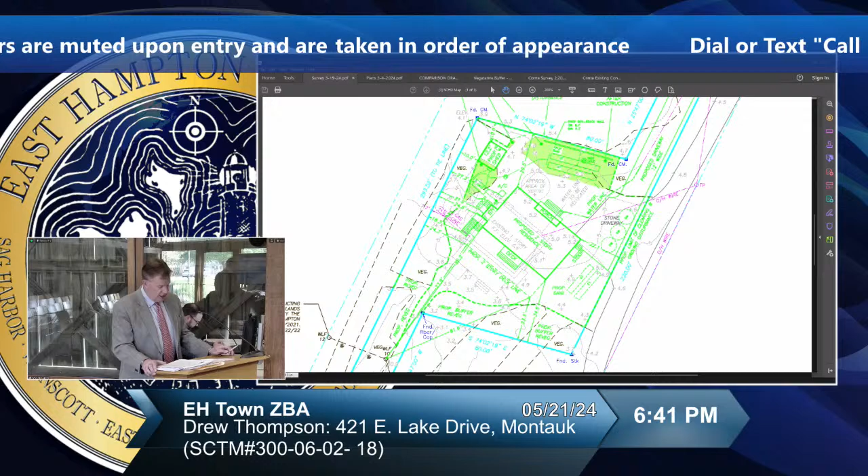Rather than challenge this and ultimately come back before you, which is probably the way this would have gone, my recommendation to Drew and Stephanie was solely to listen to the board's deliberations and discussion when you decided this, as well as the hearing, and try to revise the application to achieve the best possible result, and request a rehearing by a full board, which is why we are here tonight, and thank you for the opportunity. Hopefully this will allow for a speedier consideration of our application, which we believe we improved on in every aspect of the proposed application.

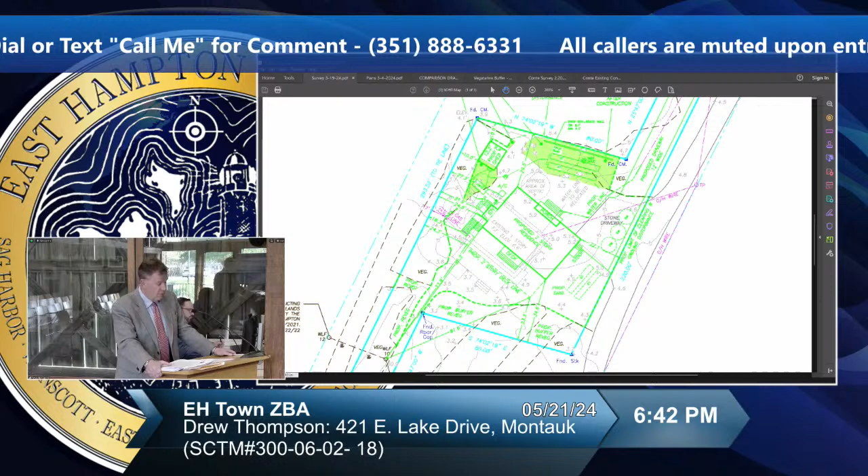We made several notable changes to the application based on the prior board discussions that I wanted to briefly touch on. The revised architectural and floor plans were prepared by Victor Cuneo, dated March 4th, 2024. I also included on Friday a graphic that I had Victor draw to accompany these that I submitted last week.

It basically shows the reduction in both the massing, which was accomplished by reducing and eliminating a portion of the roof line. That was my idea, for the record, when I looked at it, as well as the reduction in footprint and accessory structures proposed on the residence, shown in the gray outline.

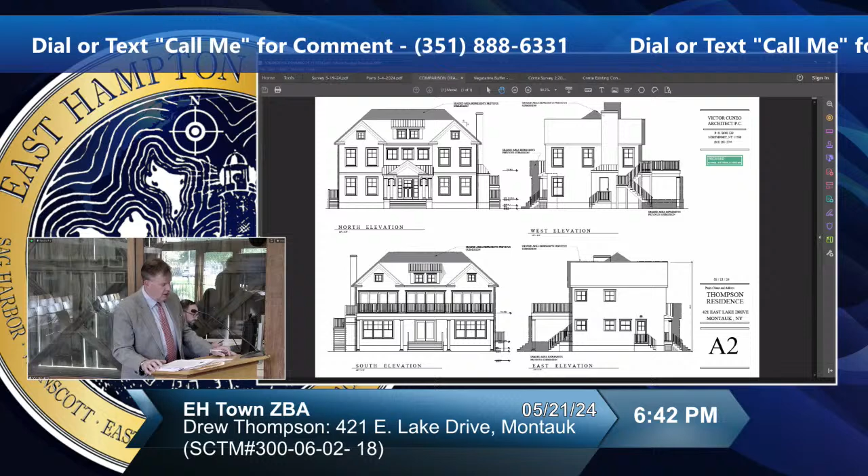We made changes to the plans consistent with the board's discussions that dramatically reduced the structure in several dimensions, as well as floor plans showing the reduction in gross floor area. As revised, now the house is 2,307 square feet or so.

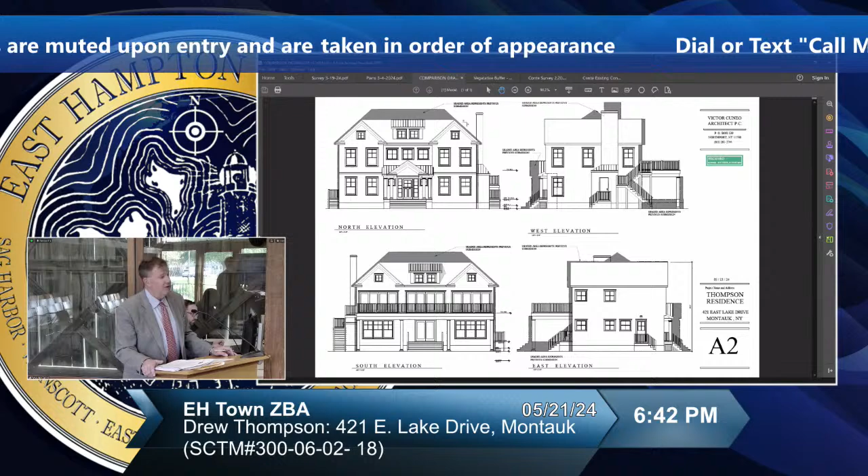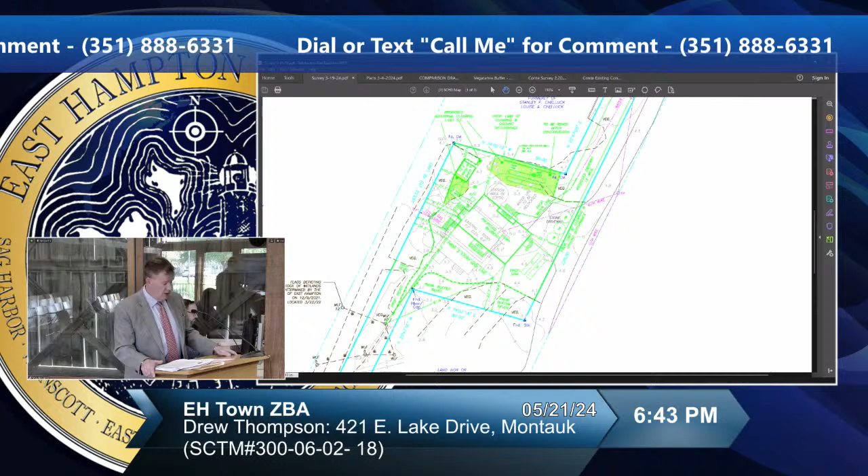We also submitted the revised survey by George Walbridge. The survey depicts the increase in setbacks. We're not talking about acres of setbacks here. This is a property that was being developed in accordance with both the need to comply with pyramid law as well as the lot area on the survey, but our decrease in proposed clearing, reduction in the decks, and the overall metrics of the application, including total lot clearing, total lot coverage and lot coverage.

We also submitted a revised revegetation plan from Jim Grimes showing that we have proposed more revegetation along the south side of the property. We reduced clearing by an additional 1,000 square feet.

I do think it would be possible to expand these planted areas if the board deemed it necessary, but I'm reluctant to tell a family of what's about to be 4, with 2 young children, that they can't have more than a postage stamp area outside to enjoy. But if you did deem it necessary, we could further sharpen our pencils.

In sum, we reduced another 365 square feet of gross floor area, reduced lot coverage by 155 square feet, and 366 square feet in total lot coverage, all from the plans that were already reduced based on the board's prior hearing.

I was sort of disappointed in the memo that Tyler prepared. He seems to dismiss these important changes to the project, particularly because 2 of the existing board members here tonight voted to approve the larger application.

I just don't think Tyler is giving, at the time, 50% of the board who voted for this application, as well as my client, any voice in this.

I can tell you the changes to these house plans, which are modest by any standard at 2,300 square feet without a basement, for the record, are not easily accomplished and were not without cost and impact to the Thompson family or their expectation. I was also dismayed to see a recommendation of the planning department that actually recommends a 2,000 square foot house on this property as being more appropriate.

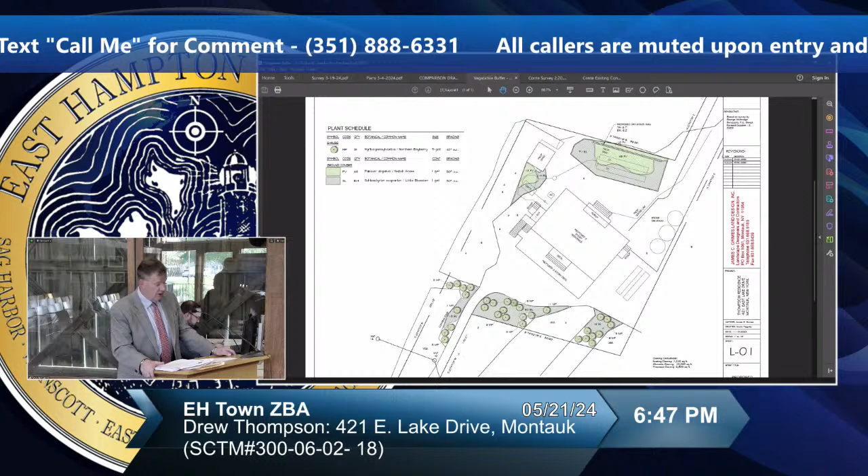I believe this current proposal qualifies for the grant of the requested NRSP and the grant of the requested variance, and will provide both the improvement of environmental conditions on the property and be consistent with the character of the community.

Perhaps this is a small improvement in the immediate area, but if the adjacent residences, some of which are much closer to the lake, and the commercial uses next door were held to the same exacting standards, the planning department would acknowledge the overall benefits of this application are a step forward in this area.

I'm available for any questions. Does anybody have any questions?

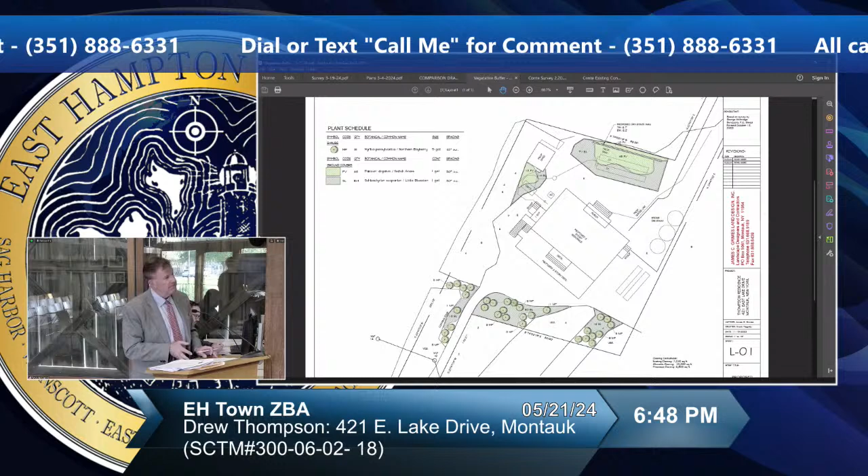You say that you're reducing it by 365 square feet. That's from the first application. What's the GFA on the house today? It's actually over, I think it's 600 square feet from the first. The prior application was 2,660, 672. Yeah, so now we're down to 2,307, 300 something. Yeah, so it's about 365.

But the house today is 888 GFA square feet, right? It might even be smaller than that. I think it's 720 square feet.

I think what's interesting here is that these 3 houses at one time, I don't know, they must have been fishermen's cottages back in the day. Clearly, the one on the front side has been redeveloped as one of the 3. These 2 remaining cottages are the only 2 remaining.

I don't consider this a small lot, by my calculations or by my experience in Montauk, nor do I consider a 720 square foot house a reasonable residential use when you account for the fact that we're going to be able to reduce clearing, install a sanitary system, and otherwise comply with all available metrics that we show in our application.

How much is the clearing going down? Between the two proposals, I think our total proposed clearing is somewhere in the neighborhood of 80. I think Tyler actually has it down with 6,800 square feet. Originally we were proposing 7,880, so we reduced clearing by another 1,000 square feet.

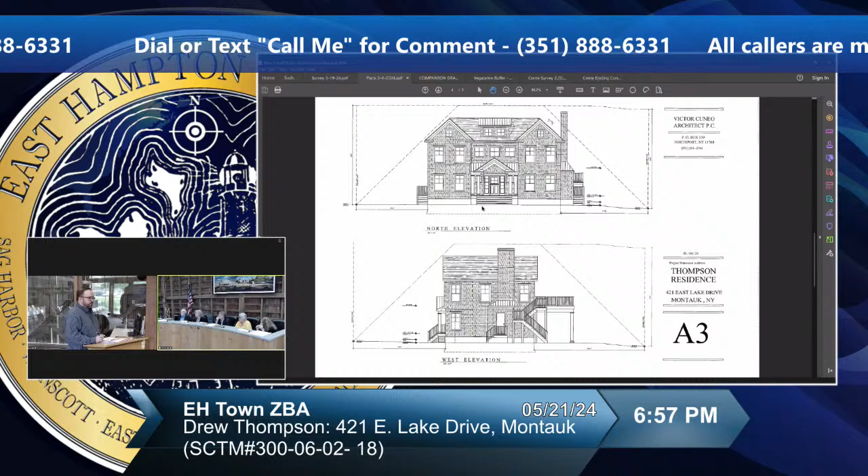Tyler, can you put that back up? I looked at it in the file, but... oh, it does show it on there, I'm sorry. The height and the pyramid lines, I'm just having a hard time seeing it. I just wanted to refresh where the house comes out now. I know it's within that, it doesn't pierce, but I just wanted to check. I'm just trying to focus, I can't see it from here, sorry, the AC's running. It's close to the line, but they are conforming.

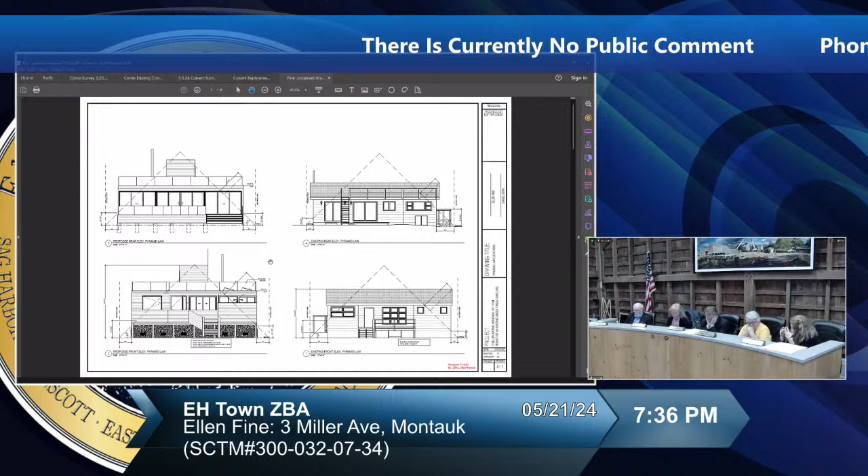And we didn't really bring it up at the hearing—we did talk about whether they could design it differently or position it differently. So I think, even with all the risks and how problematic this lot is in terms of flooding and standing water, I can't say definitively it doesn't meet the standards. So that's why I'm saying I'd approve it.

My viewpoint is that the slight adjustment in the side yard lines is diminished by the increase in environmental protection on this property. There is an increase in environmental protection—there is, that's true. So that's my feeling.

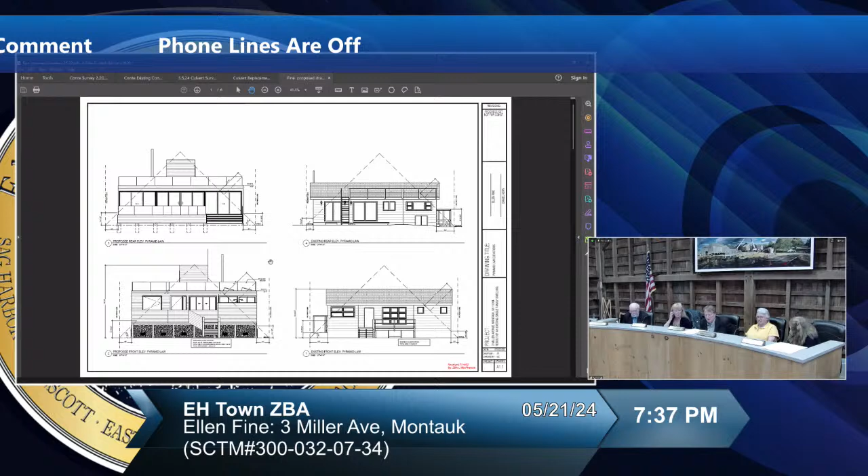So where are we, or what was your final vote? Waiting on your vote. Oh, you're approving it—okay, I would approve it, but denying the variances for that south deck and the hot tub. Well, it's all one—the deck and the hot tub, it's sort of one set of variances.

It's gonna be tough for you to write up. Yeah, I'll try. I don't have the TAM in front of me, so were there any other conditions? Conditions, yeah, I can look it up.

Brian in his memo, as far as some of the protocols that they submitted, had some recommendations. He said he has no objection to replacing the culvert, but would caution that the applicant try to maintain the existing flow rate. So there's that paragraph in his memo, so that it doesn't go faster and doesn't go slower.

Could that exacerbate it? Drew Bennett designed it, right? It was designed in his new plan. It's a design, but Brian has a concern, because he said if they don't have the right speed, if they slow it, they'll flood one side, and if they increase the speed, I don't know how we manage that, but a condition, how we condition that.

I don't think you can legislate that. No, but is there a condition of some sort of inspection and oversight as that work is going along? Is there anything that we can really do, because that comes first—sorry, not first, the septic comes first, but then the culvert happens before you get to the structures.

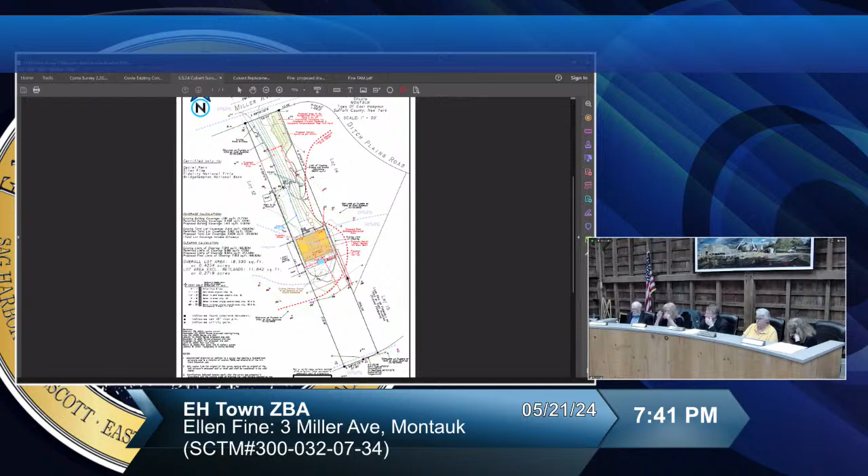I can't see, where does it go from—yeah, I see it, where's the 12-foot? Okay, yeah, 12-foot line is essentially right here. Make that bigger. Okay, thank you, I'm good now. Thanks, moving on. I'm missing my—for sure.

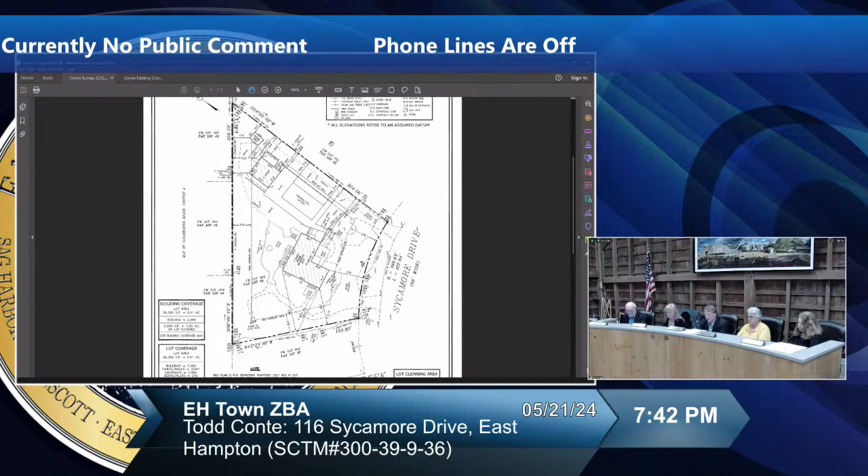We next have Todd Conte at 116 Sycamore Drive, East Hampton. Suffolk Tax Map number 300-39-9-36. This is a variance without a hearing.

Tyler, you want to pull up that illustration so the board can see it. This is a 7-inch variance, 6 inches typically. We have a TAM from Morgan, a very short one. That's the one - it'll be easier just to see. I wanted the board to see that there's the patio, the sideline, the side yard, so you can get a view of what we're actually doing here.

This is to allow a pool patio to remain 19.3 feet from the side yard lot line where 20 feet is required. As Chairman Deline noted, a variance of 0.7 feet pursuant to 255-1110 of the East Hampton Town Code, to allow the pool patio to remain 19.3 feet from the side yard lot line where 20 is required.

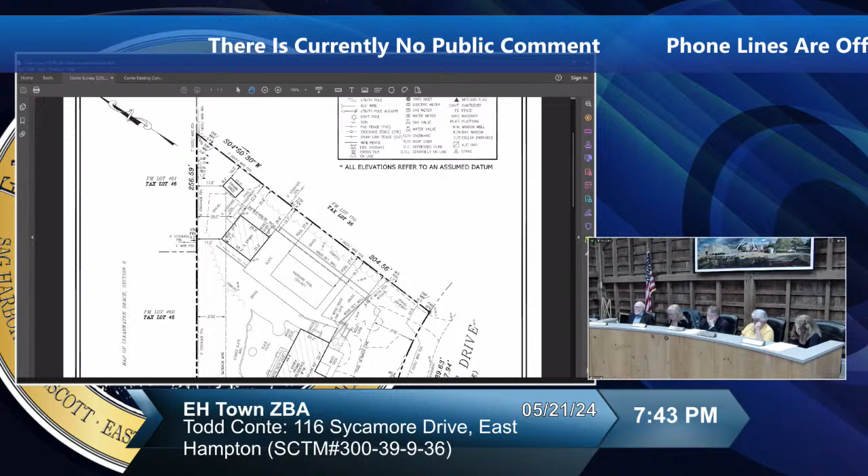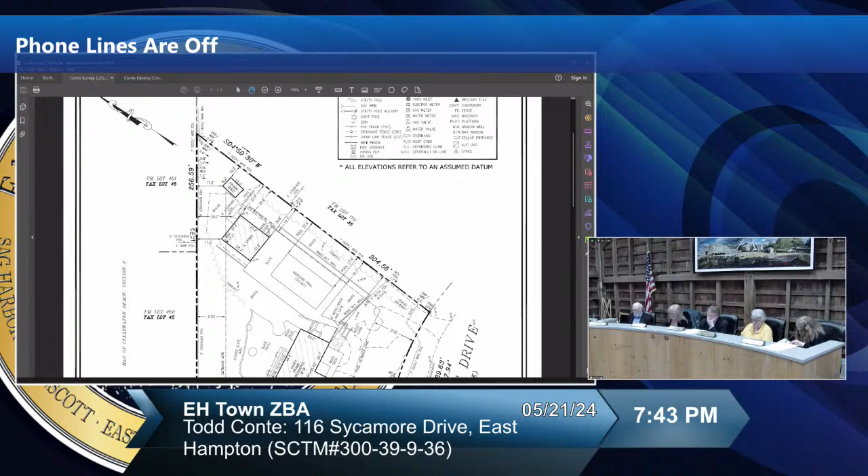As noted in the TAM, this will be very quick. It appears that looking at the building permit plans and the as-built survey, the pool and patio were constructed according to the approved plans, and the patio was proposed 20 feet from the property line, but was ultimately shifted slightly east during construction, resulting in the need for the variance. There is mature vegetation along the property that is affected by this. It's very minimal and will have no impact, and I believe the variance should be approved.

Ed? I have nothing to add, obviously. You've described it well, and I think it's a very minimalist request, and I'm willing to approve it. Thank you, I have no problem with it. I'm the same, okay, I have no problem to approve it.

Okay, in other decisions, we have Tourmalet LLC, 250 Old Montauk Highway, Montauk, Suffolk Tax Map Number 300-87-3. It's a modification to the 2022 determination, and I am recused from this application.

And I am dissenting. For some reason my PDFs are taking forever to open, so it'll take a minute.

The modification is for a permit which was granted back in 2022. That original permit was to demolish the existing improvements and construct a 4,252 square foot two-story residence with approximately 2,312 square foot first and second story terraces, a gazebo, swimming pool, and sanitary system on a parcel of land containing coastal bluffs and beaches.

The current modification consists of reconfiguring the floor area on the basement, the addition of a bedroom, bathroom, dumbwaiter, and the reconfiguration of a storage area on the first floor, and the reconfiguration of terraces, butler pantry, and barbecue area approved on the second story.

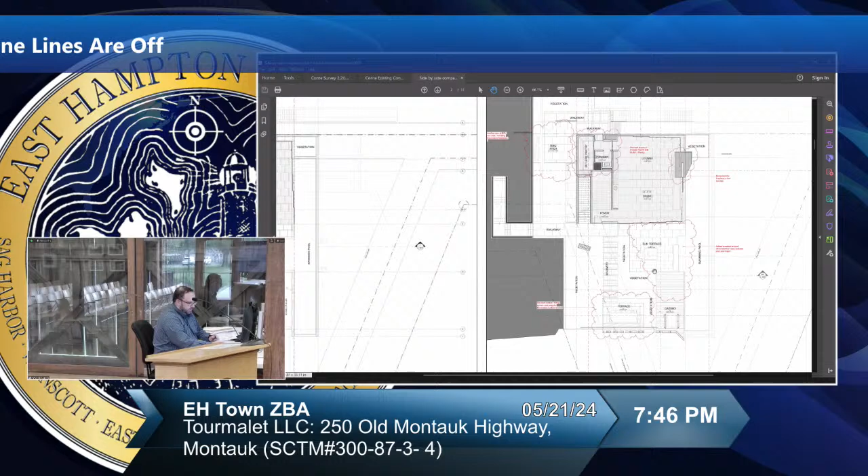This is the second floor. This is essentially what was approved, and this is what they're now proposing. So they're proposing some changes to the barbecue area, some interior changes to the building, a new sun terrace where there was a fire pit and terrace previously, and changing of some terrace structures, and a gazebo, which adds to the coverage, which is why the building coverage went up slightly.

So can you just show where the 333 square foot increase in building coverage is? I think that's the gazebo area, a roofed area over a patio. I don't think it's an increase in the building at all, I think it's an increase in just roofed area, which increases building coverage, or lot coverage as it would normally be called.

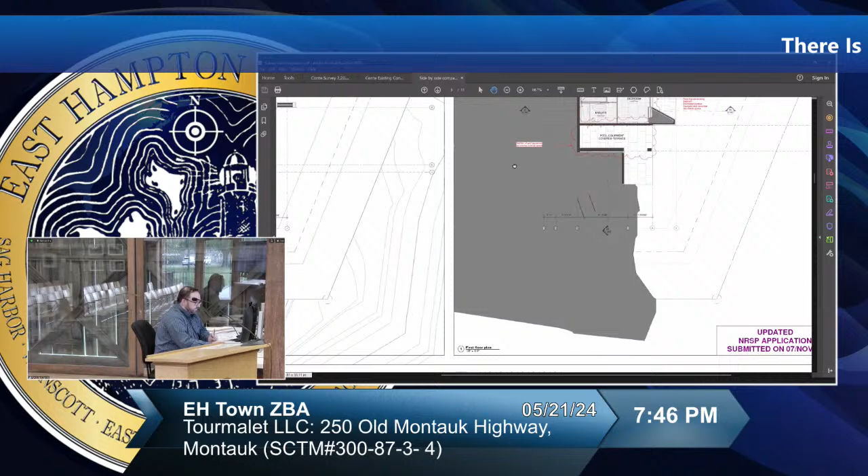It says addition of a bedroom, but I didn't know if it meant there's an addition of a bedroom in the basement. So is it a net add of one more bedroom, and how many? Yeah, to my own knowledge, it's a net add of a single bedroom.

This is the basement, it didn't really change much. They just got rid of this home theater down here and made it a mechanical area, and changed some storage around. It looks like some minor changes made this a laundry area, and then the dumbwaiter, which goes up to the floor above it, probably for the laundry area.

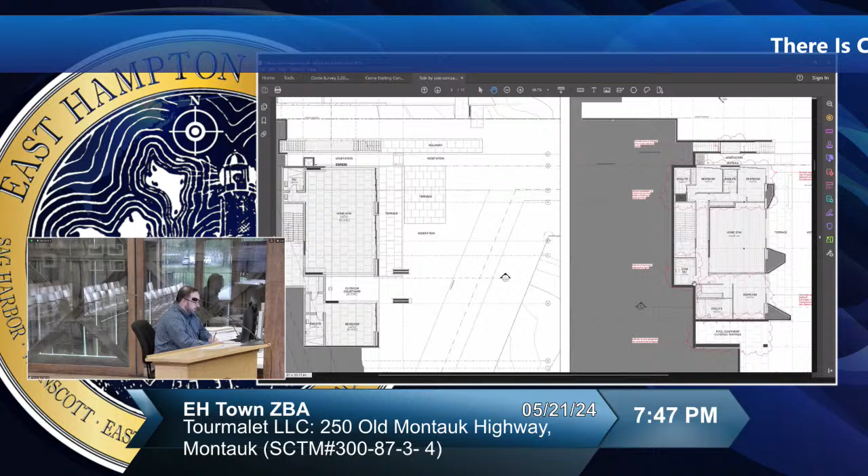The main changes to the interior stuff are on the first floor. They changed the bedroom around slightly. It looks like that's probably where the reduction comes from, they made this a pool equipment area and covered terrace, and then changed the bedroom around a little bit.

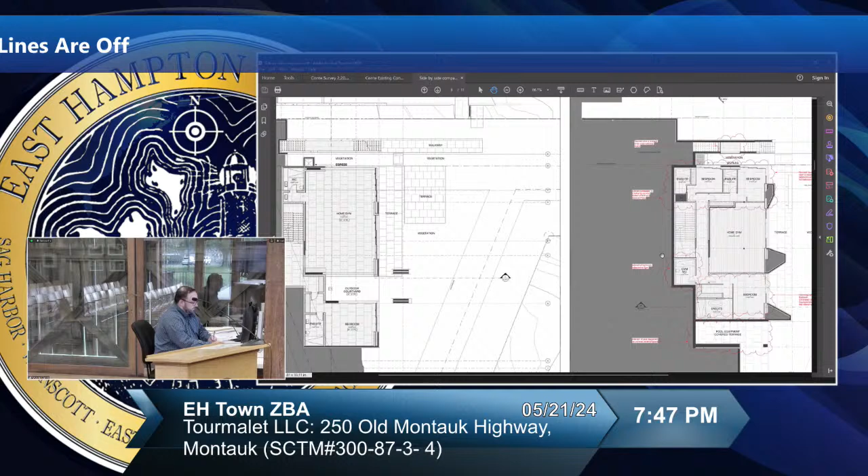They drastically changed what the home gym is - it used to be really big - and then changed some bedroom things, added a bathroom it looks like, as well. And then they removed this terrace, which would be here, which is on the water side of the lot.

And they made design changes, but it has not changed significantly the scope of the project. Correct, yeah.

Should someone start? How do we want to proceed? So it went down in GFA? Yeah, let's see. A 7 square foot reduction in gross floor area. I wouldn't say it's significant, but yeah, it did technically go down.

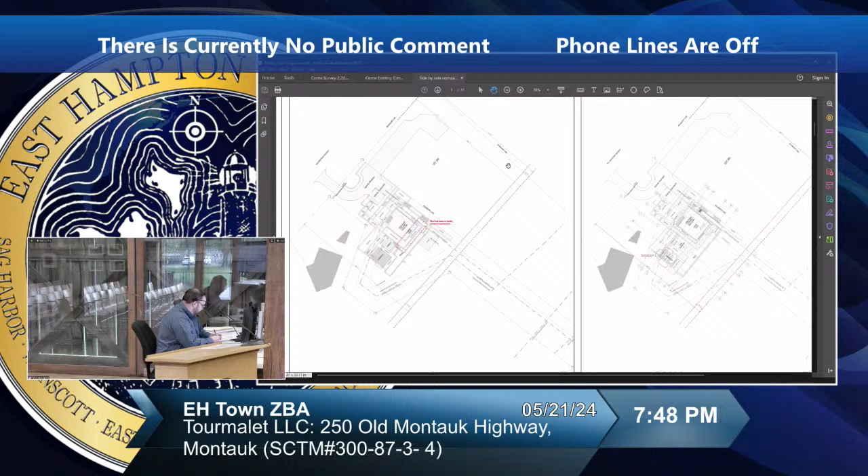And something else changed, the coverage? The building coverage went up, or lot coverage really, went up 885 square feet. Oh no, I'm sorry, building coverage went up 333. Total lot coverage went down 885 through a reduction of terrace and patio area.

Right, okay, and the terrace they removed is on the seaward side. Correct, that's good too. Yeah, that would be this structure here. I think I'm okay with it.

This was a case that we spent a lot of time on because it's sensitive, it's on the ocean. There was a lot of discussion over the placement of the house and how it was to be constructed. Building protocol took up a lot of our time. There's some sensitive neighbors. If this was going to in any way affect that neighbor to the northwest, or the access road to another house that sits below it, it would be a big issue.

But to me, there's not a significant change in the scope of the project. This is all basically minor changes to the architectural layout, so I'm fine with it. I see it that way too, I'm fine with it. I mean, the reduction in the scope of the whole project may not be a big percentage, but an 885 square foot reduction in total coverage, I can appreciate.

And then, I like when applicants actually come for a modification before they do things, as opposed to, we do see sometimes people come after. So I take that into account. And so all in, I'm okay with this.

So for the record, Chairman Deline has recused himself. I am dissenting, and the rest of the board is in approval. Thank you very much.